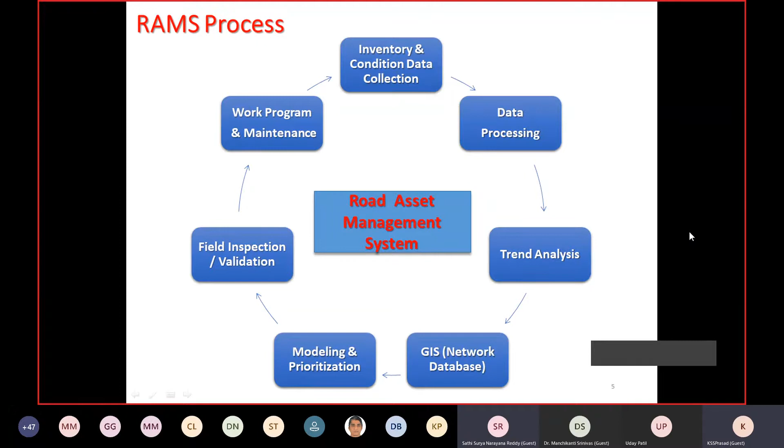So when it comes to the AP RMS case study, what we have done is basically there are three major objectives. One is to establish a physical RAMS system including the GIS database linkage. So a system is to be established because it's the first time in the state of Andhra Pradesh - they did not have it earlier.

And then prepare multi-year rolling programs, or maintenance plans for road improvement, annual maintenance plans. Multi-year means every time I generate a 5 or 10 year maintenance plan, and every year I generate, so there is an overlap of the whole system wherein I start building the dynamic database, and then institutionalize the RAMS system at the organizational level, the R&B department level, and then transfer the skills and procedures to the staff designated in the department to take it up on their own.

Hope I am not going too fast. Please interrupt me if I do so.

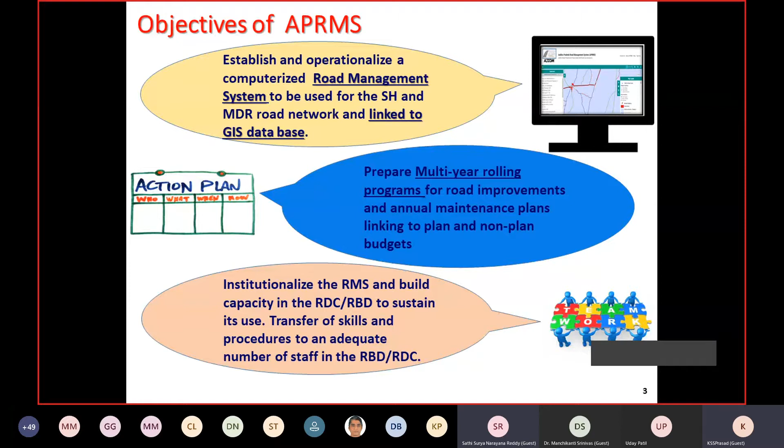Okay, the RAMS framework we adopted to do this case study involves four major components.

The first one is data collection, wherein automated survey vehicles are used and we collected a lot of data. I will give more details on the data, what we collected and how we collected it, in the next slides.

We created various types of information systems which are subcomponents of RAMS. RIS is road information system, BIS is bridge information system, PMS is pavement management system, RMMS stands for routine maintenance management system, and TIS stands for traffic information system. So there are several subcomponents of RAMS, overall five subsystems we call them.

We use all these systems together to take decisions and model the data for decision making. For modeling this data, we use the Highway Development and Management tools developed by the World Bank, HDM as we call it. I'll give more details later.

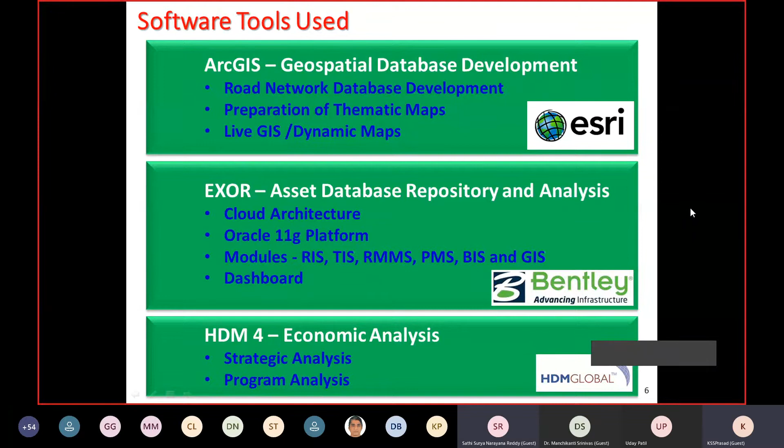This entire architecture is working on a cloud architecture, as I mentioned earlier, meaning there is no physical hardware system. Everything is on the cloud environment, and what we are using right now is on a web architecture. There is a server in the cloud, and we access the server and put up the data there.

This data is loaded into the Oracle database using loaders, we call them CSV loaders. Once the data is enabled, each data goes into its respective component or subsystem, like the traffic system will have the traffic data. Then data analysis, data maintenance, and validation of outputs - all three components use the same system and same subcomponents.

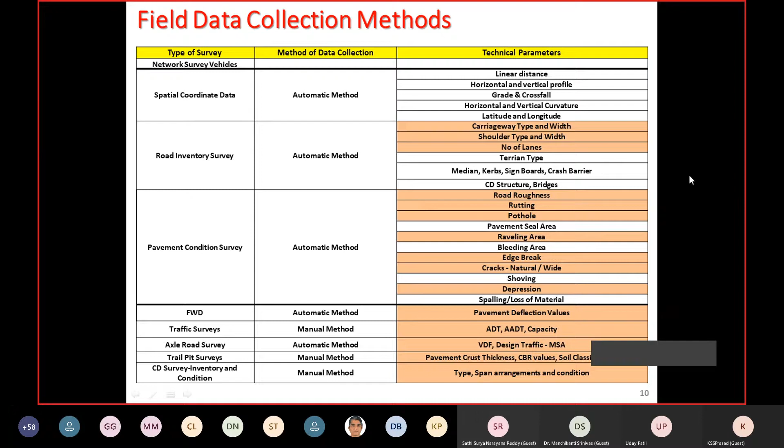Shall I go to the next level? Yes, sir. Yes, sir.

Yes, as part of our case study, as I told earlier, we also need to come up with what kind of data, and when should I collect it.

Because based on the road usage or the traffic or the various road and pavement composition details, we have to give the department guidance on where to collect, when to collect, and what kind of data.

Now we look at the kind of data collection mechanism, as I told earlier. This is the kind of NSV vehicle which has varieties of things.

You can see the zoomed in portion wherein there is a laser profiler which collects the IRI, International Roughness Index.

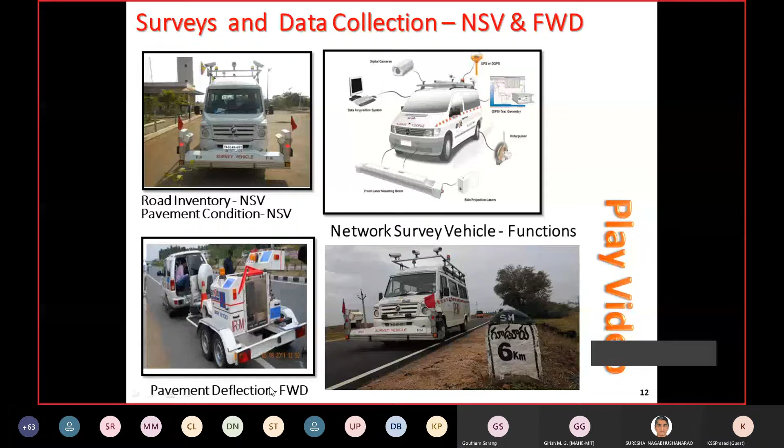You are seeing slide number - yes sir, 12 we can see now. Now 13. No, you need to show the slide. Yeah, it's showing it already - now you are on 13. I am there only, no, there is a little blackout, we can't see. Yeah, we can see the entire screen it seems. Now you can see - yeah, you are on the 13th slide. Yeah, everybody is on 13 only now? Yes sir, yes sir. Okay now, yes, show the slide.

Yeah, I moved to the next. No, no, still we can see the 13th slide. Actually it should be in slideshow mode. Slideshow - yeah, it is not in slideshow mode. Yeah, we can see some. I did not do anything. Now? Now 14, yeah, slide number 14. Okay, I'm just moving, can you see the change now? There is a little delay it seems. Okay, can you show the slide and then keep moving a couple of slides.

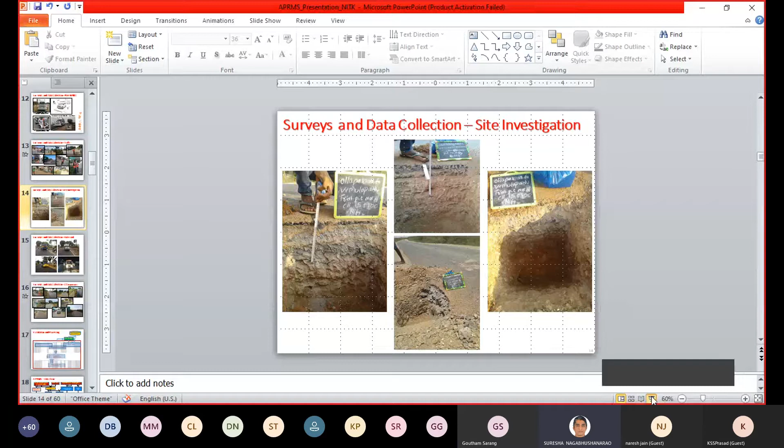Hello, yes, okay can you show the slide? Slideshow - yeah, slideshow only, I am in slideshow. But we are seeing - I think you are not selected, I think you might have come out. Can you come out of this screen sharing and then share again? Oh, I am in the share tray only, sir. No, because we are seeing - I am in share only. I am very much in the share tray. Okay, that's what - can you come out and reshare it? I have to break it and, yes sir, yes sir. Can you see now? Yeah, slide number 12 we can see, not in slideshow mode, it is in layout mode. Since it is somewhere blocking, that's why - hello, better come out sir. Yes, while sharing just select the desktop, don't select the PPT window, don't window share, select desktop sharing. Yeah, I am using desktop only, dear friend.

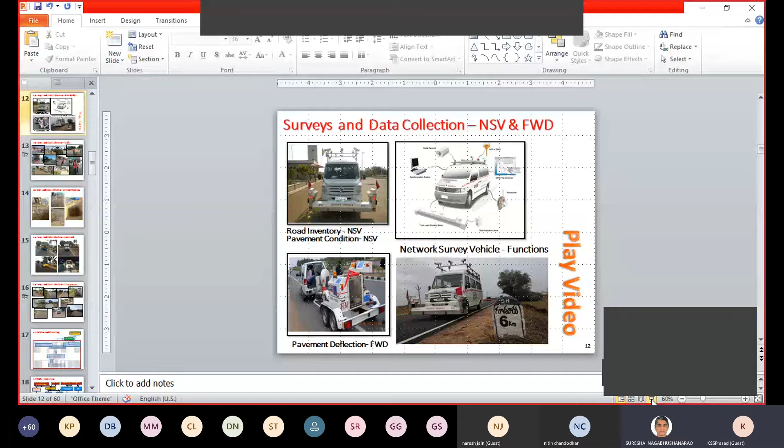Go to 13th, 14th, like that. Yes, I am going. You are not able to see. Okay, can you show the slide? I am moving now. See sir, we can't see, the same 12 is still there.

Probably while selecting the PPT in the tray, you might have selected double. Already there is a slideshow file open. No, I'm sure.

What is that you are seeing now? Now the complete layout of the PPT with sidebar. It is, yeah, not... you have kept the cursor at an image having a milestone 6 kilometer. I think it is not showing, somewhere it's physically blocked, I believe.

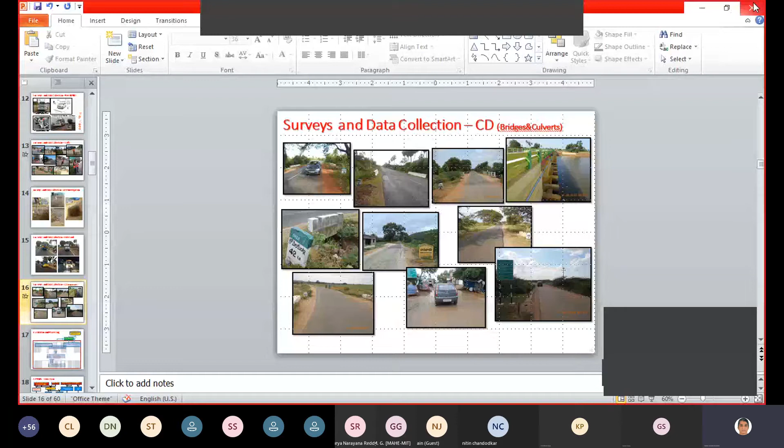Okay, please can you come out of that, close the PPT. Open the PPT and then make it a small window of the PPT. Don't go for a slideshow, don't go for a slideshow. I'll do that, okay.

Now I closed the PPT, I'm again opening it fresh. So you are not seeing anything now? No.

Is my screen shared right now? We don't see, we're not able to see anything. I mean, I can just see the display initials of all the participants, around 9 participants.

Okay good, okay I closed the PPT, now I'll fresh screen share. I will, don't show the slide now itself. Okay, okay.

Something utter wrong, it's not.

Okay, not able to... now you can see the... yeah, yeah, you have selected the complete layout, right? PPT layout, correct correct. Now the first slide, you are able to see it in the layout. Yes, slide, yes yes, okay.

Now I think, now can you show slideshow? Can you go for slideshow? Yes yes, I am going, I am going. You are able to see the next slide.

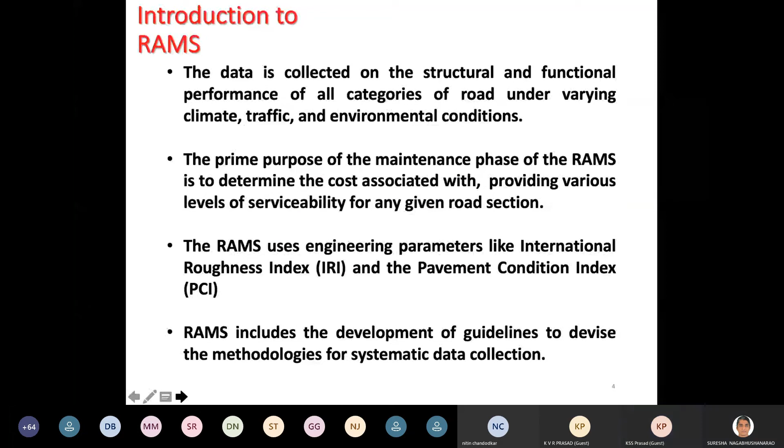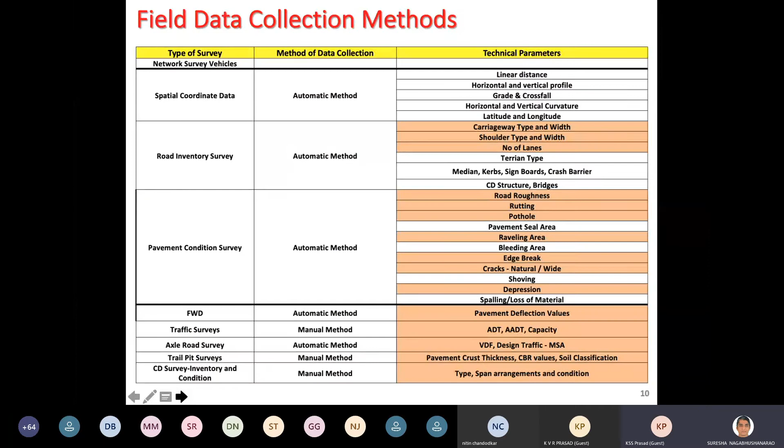Other thing is there is a restart of the slide numbers. That's okay, you just continue, we'll correct it and give you. That's not an issue, please carry on. I hope for everybody it is visible, and I hope we stopped at this level. Am I right? Yes, yes sir.

Being all civil engineers, we are all aware that CBR is one important parameter which we collect through this log, and then try to understand the pavement composition, which you can see - the pavement crust thickness is measured using tapes and things like that. This CBR is again a soil test done in the laboratory, and the CBR value is arrived at.

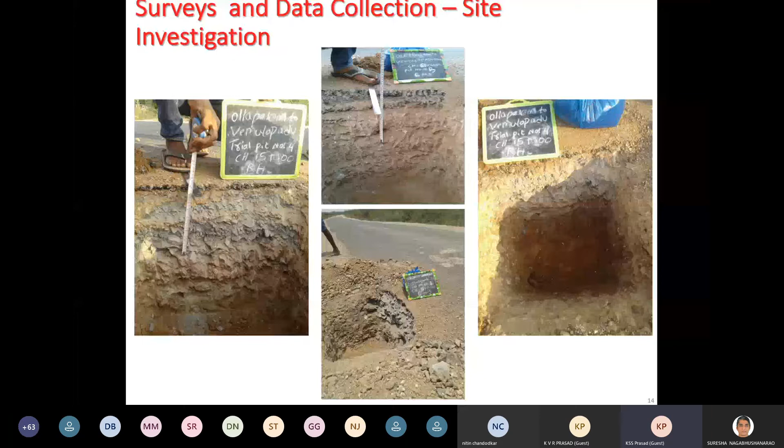Go to the next. And axle load is one important parameter which again gives you the load of the vehicles which the road is bearing or being used. This is another important parameter to define and derive what kind of pavement composition we should have. So this is another data which we collect using pads, which you can see under the tire of the vehicles - a pad is put and then they will collect the vehicle loads. Okay, next.

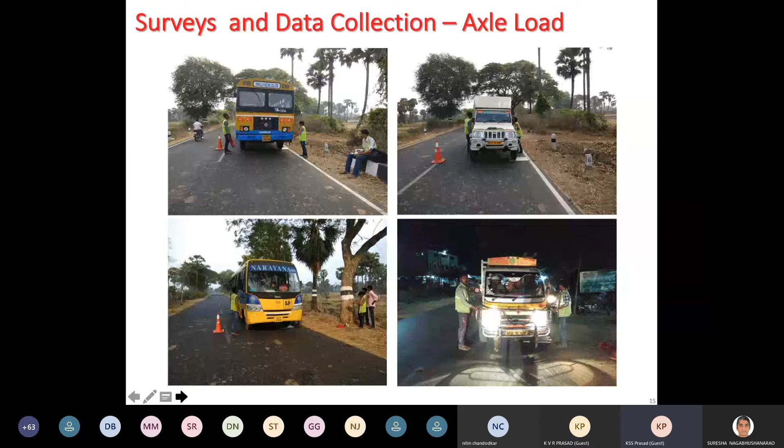And as I told you earlier, along the roads, the cross drainage structures, CD structures, which are basically bridges and culverts - the bridges and culverts data is collected, and there are a number of parameters on each bridge and culvert that is collected. I will explain the data further. Next.

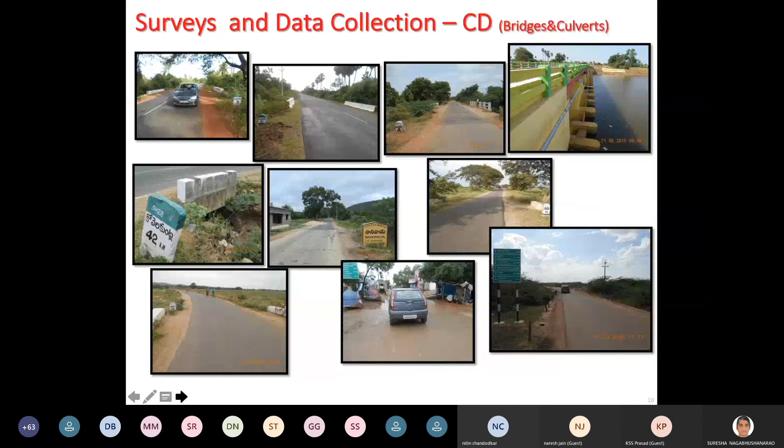After doing all the data collection and compiling the data, we need to validate it for several reasons, like there may be some manual entry mistakes, typographic errors, or compilation errors, or issues while merging the data - while merging, you might have missed something. So for all this validation, there are certain scripts needed to thoroughly check the data quality and validation. We have come out with that kind of validation. I'll just give you an example.

In Indian conditions, IRI, which is a roughness index parameter, is an important parameter. Normally in the international scenario, 16 is the upper limit of IRI. But in our Indian conditions, on majority of our roads, we get even 20, 25, 30 number also of IRI, which is something like an ECG of a heart - IRI is for a road. So we need to restrict the validation criteria - beyond 16, we don't want to accept that value. Either it could be because of a bump on the road, or maybe a physically completely road gone off the road, that kind of thing.

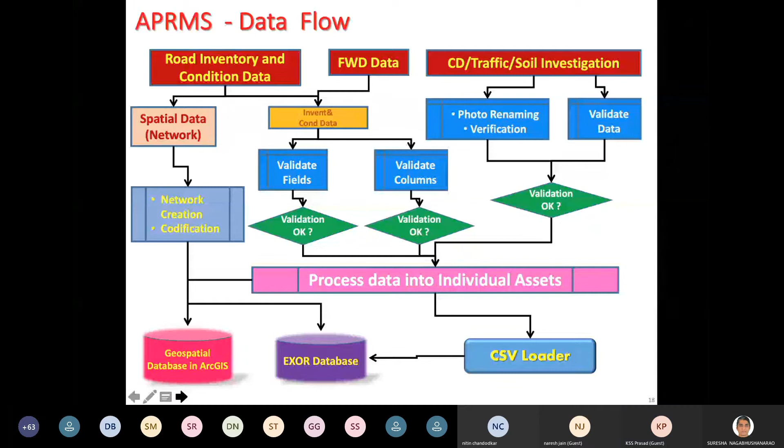The first step we do is GIS database creation, the spatial database creation. Using the DGPS data - hope you are all aware, DGPS stands for Differential Global Positioning System - it gives GPS with high quality measurement, sub-meter measurement, centimeter level accuracy.

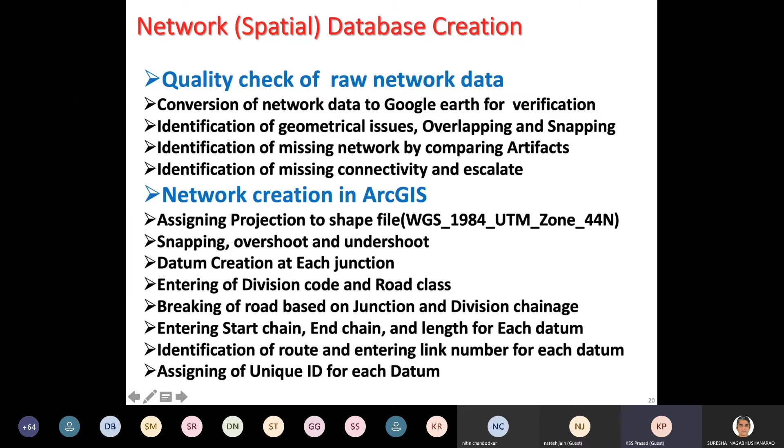Let's go to the next slide, I can explain the map making process. You can see here two parts. The first one, the top, when we receive the DGPS network data, that is overlaid on the Google Earth satellite imagery - we have all the satellite imagery from Google Earth. Hope you are all aware of Google Earth; people use it, even in Google Maps there is a satellite option. It's the same data coming continuously on screen, and then we can cross-check the road network correctness using the satellite imagery overlay.

After doing all the corrections, we create what we call route creation, and that has a lot of parameters - it involves the start and end chainages of the road, the datums, and the junctions. Like here, the green one is a road going here, and I am adding another road in red color. There is a junction formed here. The nodes of all junctions, start points and end points, are created with a numbering system, and we can use them for analysis at the next level. So this is called route creation.

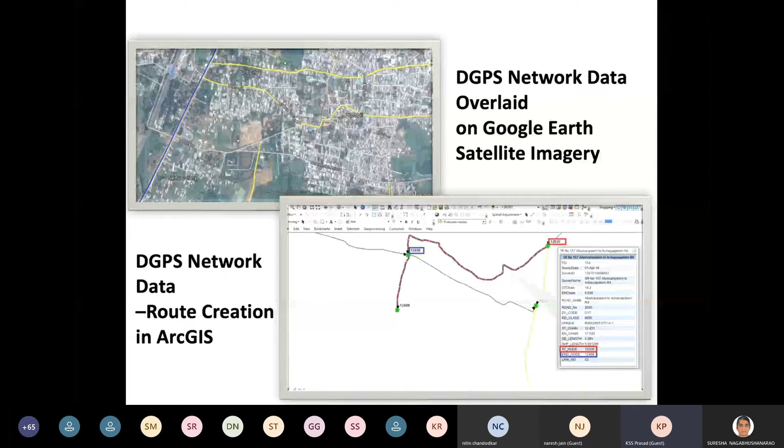The network analysis functionality, commonly used in Google Maps for our navigation every day, is basically the network analysis functionality which creates these maps using road navigation. Like when you go from Hyderabad to Bangalore, we put it on Google Maps and see navigation continuously coming on. This is the function which is the first step to generate a road route, then adding all these nodes and defining them. This is exactly what was done for the entire state of Andhra Pradesh, for all state highways and major district roads.

You can see here 4 parts. While doing the GIS data creation, there are so many issues we need to resolve. Like here, there is a missing link in the first slide - hope you can see it clearly. This missing link is basically because the DGPS has not given the data, so there is a snapping issue. I need to snap it and then join this road junction.

There could be another difficulty - a road is surveyed 2 times and I am getting 2 overlapped segments, so I need to keep one and remove the second one. Then the third one, there is a physical gap - there is a circle you are seeing, with 2 parts coming and stopping at the circle. Can you see that?

Yes, sir, we can see.

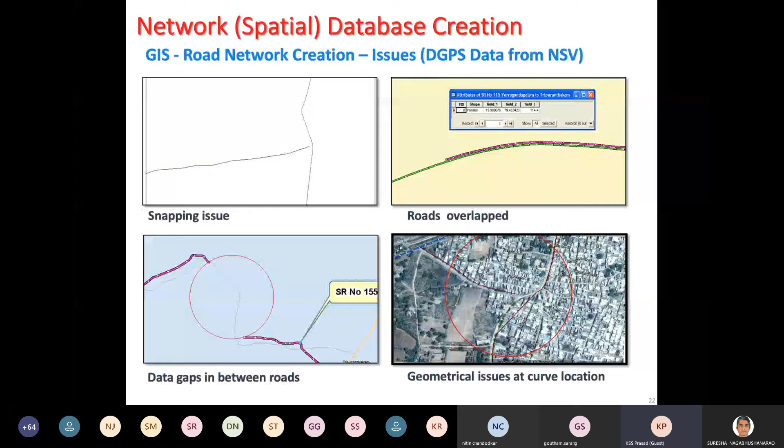Go to the next slide.

With all this being done, the entire state is now having the sub-meter accurate road network map of Andhra Pradesh, which has all the routes created. It is a linear reference system, LRS. Basically, it is a chainage based system, which is in practice for all the civil engineering fraternity.

And it is network analysis ready, and there are unique IDs built for all the analysis. State highways and MDR codes are also generated. There is a coding system with the NHAI, National Highway Authority of India, following from north to south and east to west. That same mechanism is used also in Andhra Pradesh for the state highways and MDRs.

Go to the next slide.

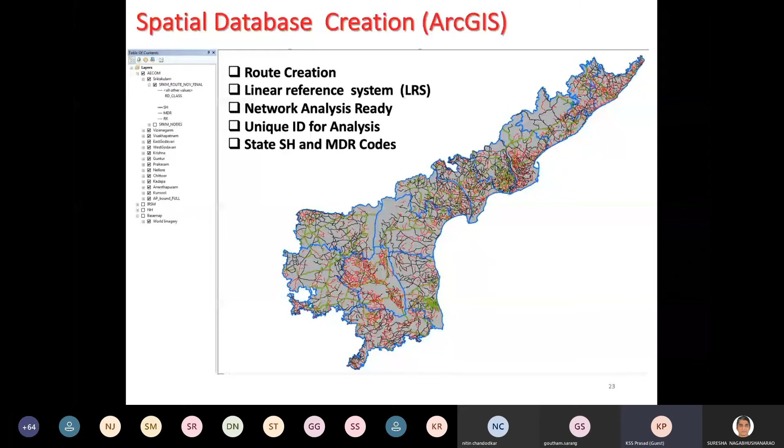In the center you can see these are all state highways. The state highways are numbered and the major district roads are also numbered for common usage. This data is already given to Google Maps and they have embedded that into the Andhra Pradesh road network map of Google Maps. So this is the kind of contribution done to the general public consumption of this database. Next slide.

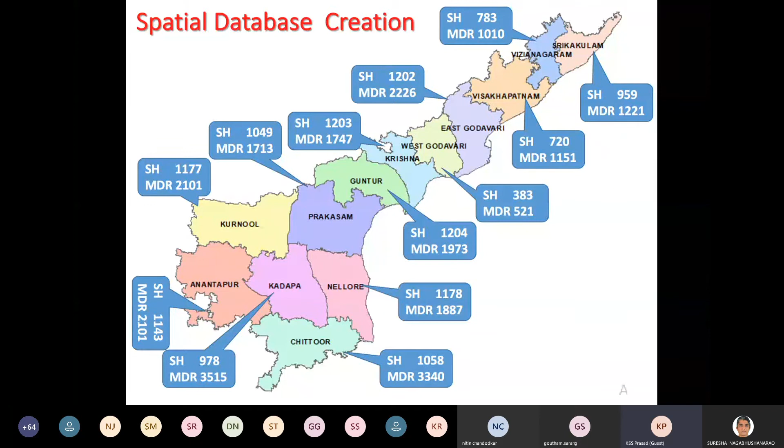We can now look at some numbers. Every district in Andhra Pradesh now has a number of state highways and number of MDRs, starting from Srikakulam to Anantapur in the south. So all the state highways and MDR roads, district wise, are now numbered and the number of roads is available. Next slide.

As a sample or example, I am showing you the GIS database created for one district. This is called Prakasam district, south of Vijayawada. You can see here the red color indicates the national highway network, and green color and red color are the state highway and MDR roads. Next slide.

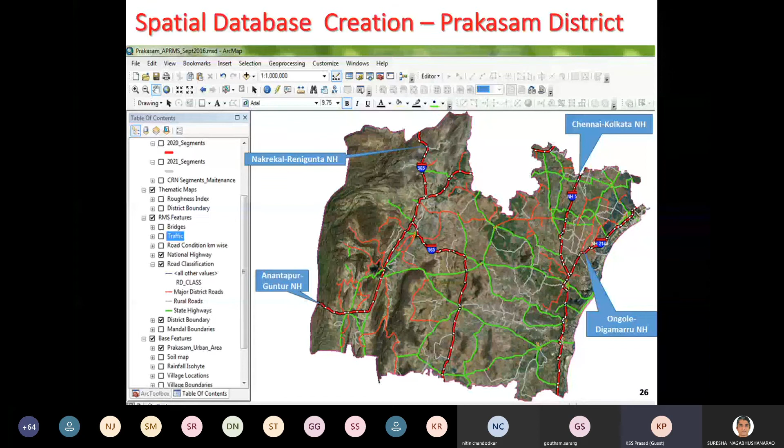Hope you can see. Yes, I can see.

Here you can see the road network overlaid with the mandal boundaries. In Andhra Pradesh, we have the administrative divisions as mandals, next to the district. So all the administrative jurisdictions with mandal names and roads overlaid, this database we created for the road network is now put into practice in the state level GIS database system.

And you can see star marks and plus marks on the roads, which are nothing but major bridges and minor bridges and culverts. Like that, traffic and other data is also embedded into the system. Next one.

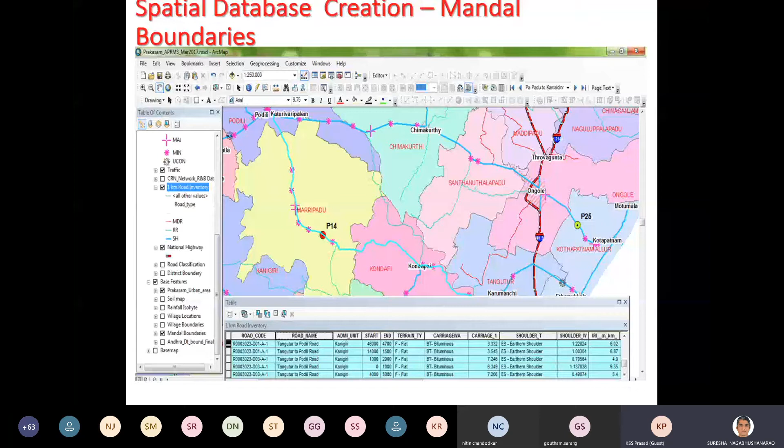Next slide. Is this road inventory? Next slide. You want? I am at the 30th slide. Yeah, you are right. Should I go forward? One step back. CD inventory. Back. Road inventory. Yeah, give me road inventory.

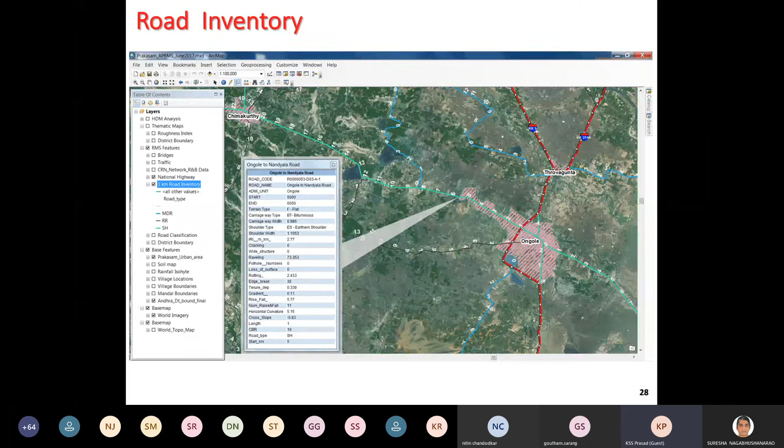Now we conducted traffic volume surveys. Every traffic volume survey is conducted at a designated location. There are about 65 to 100 locations, and each location's data is already analyzed so we can see the AADT value of the traffic survey. The AADT value for this particular traffic is 2102, average annual daily traffic numbers, and the PCU, passenger car units, is 1828. So this kind of traffic information is also embedded into the GIS system. Next slide.

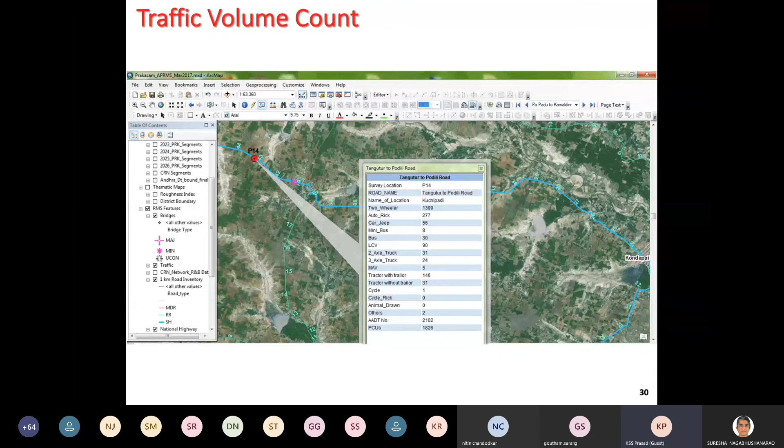This is an important parameter, IRI, which we explained earlier. IRI is International Roughness Index. This is the primary parameter nowadays to check the condition of the road, whether it is good, bad, poor, or whatever. By IRI, people immediately know the condition of the road. Now, this IRI data is continuous in nature, meaning every 10 meters the IRI value is generated by the network survey vehicle, and that data is already with us.

Now I classified the same IRI into the standard practice of IRC, Indian Road Congress. IRC tells us 1 to 3.4 IRI is good, 3.4 to 4.6 is average, 4.6 to 7 is poor, and 7 to 17 is very poor. There are 4 classification levels in this IRC system. Using that template, I classified the entire IRI of one district's road network. You can see here that the majority of roads fall in the poor to very poor range, shown in violet and red color. I hope you can visualize that.

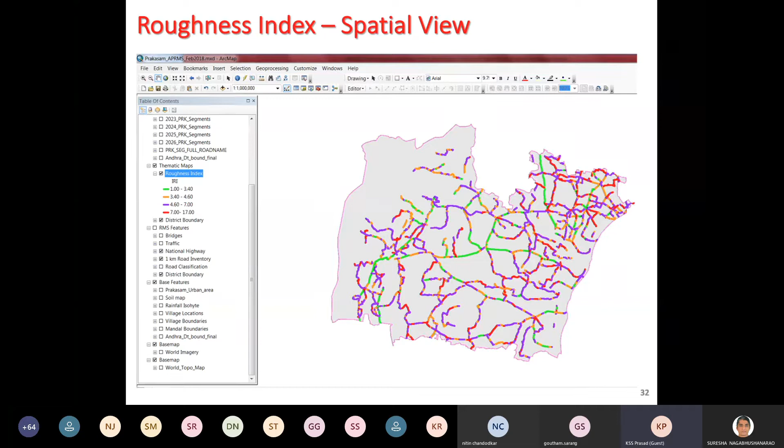So this is the kind of analysis we can do with several parameters. I just took this as an example because IRI is an important parameter. Using this, we can see the condition of the road, or which sections of the road are bad, good, poor, or whatever status they are in. Next slide.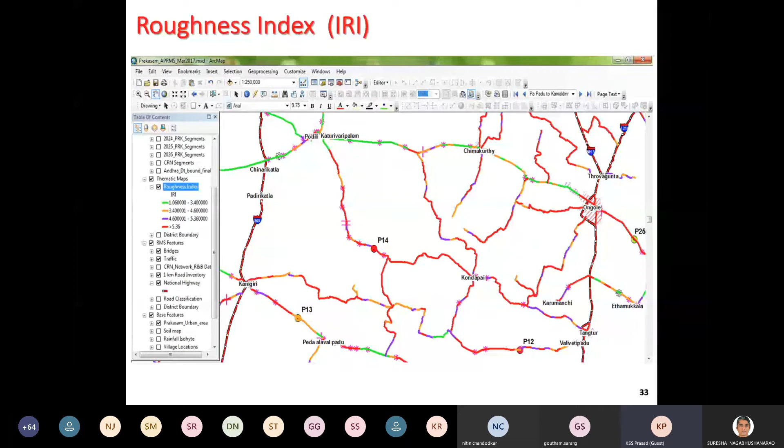So a zoomed view of the same IRI lets us see more clearly. Each section of a road is physically in several states as far as pavement condition is concerned - certain parts are good, certain parts are bad. But this IRI survey was conducted in 2017. Now, after 2017, based on this IRI and other parameters, we are giving some maintenance programs. After doing the pavement strengthening or whatever it is, you again have to conduct this kind of IRI survey to physically see the difference between the later and former pavement condition, strength, weakness, or whatever state it is. Next slide.

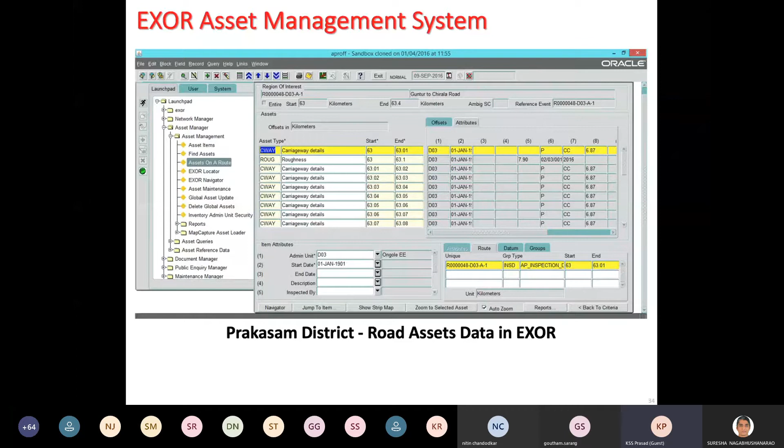Now, in the beginning, the system architecture, we were explaining there is an Oracle-based database repository. This is nothing but EXOR software. This EXOR software is a cloud-based asset management system software. You can see here on your left side varieties of subcomponents which I explained in the beginning, like RIS, TIS, BIS kind of things. Each one is a subcomponent and the data is fed into one single road here.

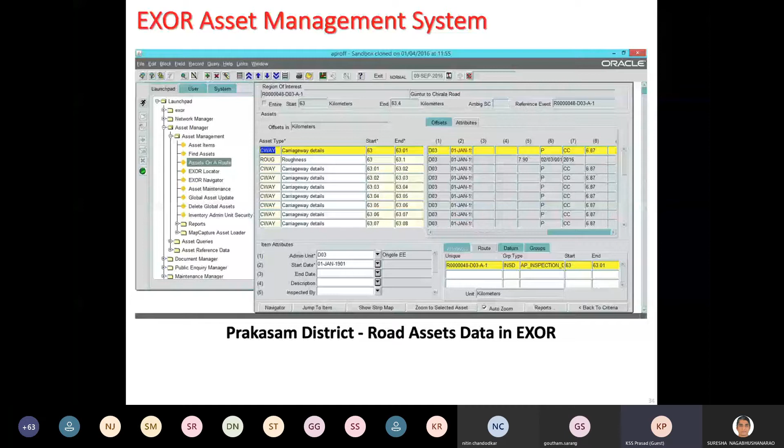On your top, you can see the road code, and then the road, each section is given the start and end sections and then the various parameters. Like this, EXOR software takes all the road network data into the system and maintains that as an LRS system. Next slide.

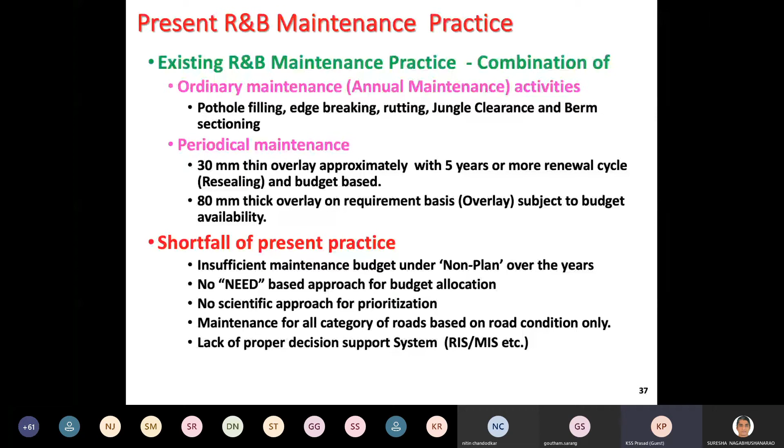Now, all the roads are the same to them. There is no categorization, there is no prioritization, there is no state highway, district road or rural road concept. Whatever is required, they will do small terms of maintenance. So there is no decision system already available with the department in a scientific manner. This is the gap which they have today. Now we have the data with us. So how to come to their rescue and how to develop a maintenance plan for them is our next task. Next slide.

Let us just try to understand the one Prakasam district, what we have seen in the data just now. How many number of roads are there? There are 40 state highways, and the total length is 1050 kilometers. And what is the IRI? IRI in 2016 is 5.2, and the overall quality is poor as per the IRC, Indian Road Congress standards. It is the poor category.

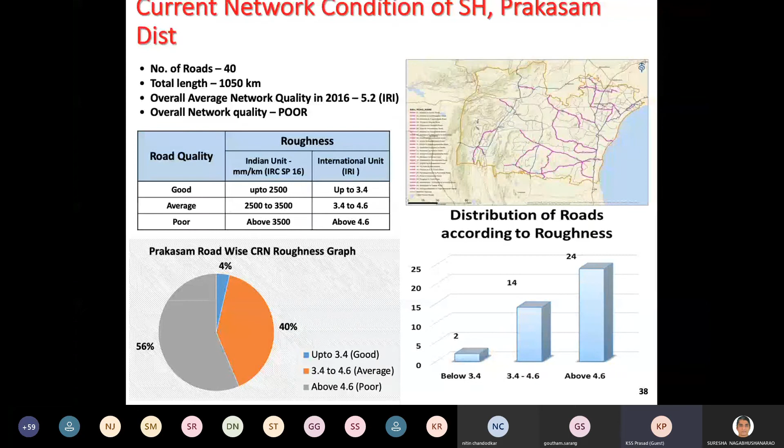Now, looking at the poor category roads, what is the kind of distribution among these roads we have seen? There are 24 roads which are very poor, 14 roads are average, and there are only 2 good roads within the district. So out of 40 roads, the good roads are only 2. This is the kind of current network condition of one district.

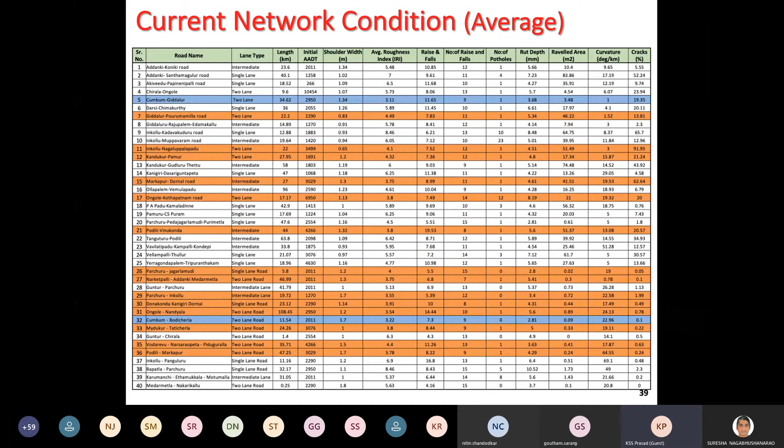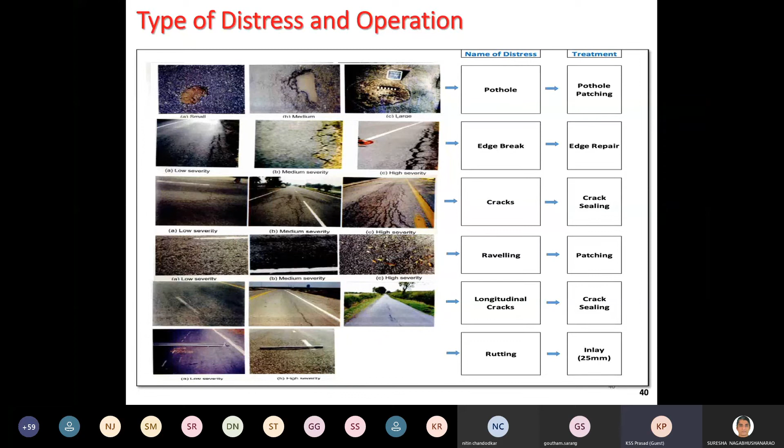The same way, if they do an overlay or resealing of the road, when do they do the resealing — like when the IRI is more than 5 or whatever — berm sectioning, when do they do it. All this kind of distress and operations, what they do presently, we try to collect.

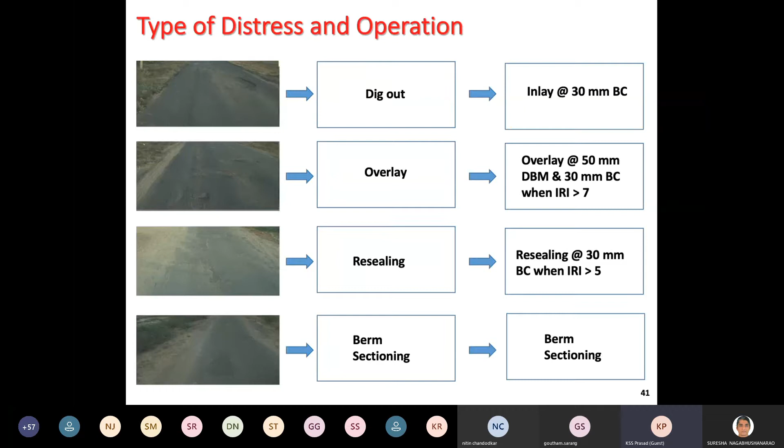Then we try to understand what is the strategy we need to adopt for the maintenance of these roads. What is our overall objective, and then what is the strategy we need to adopt?

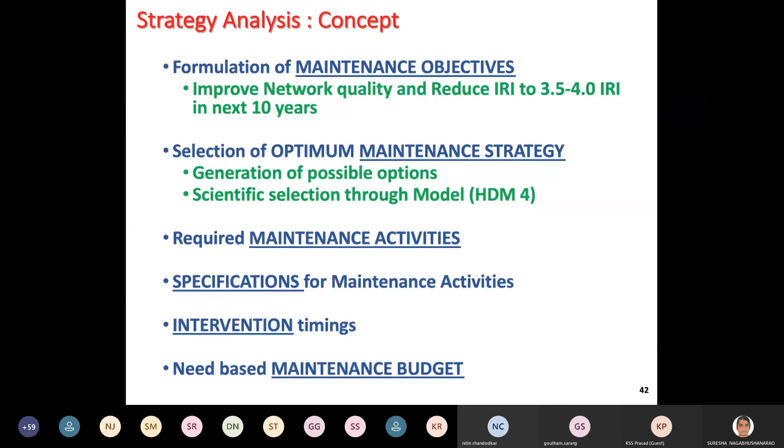Now here you can see what is the present practice and what is proposed in our road management system. A variety of routine maintenance activities, pavement related, non-pavement related, and periodical maintenance activities — all 3 of them put together, what is the overall strategy we need to adopt?

So there are 6 possible strategical options in the HDM4 software. The modeling software can give 6 kinds of best practices. There are 2 types of practice — one is scheduled based practices, the other is responsive type of practice.

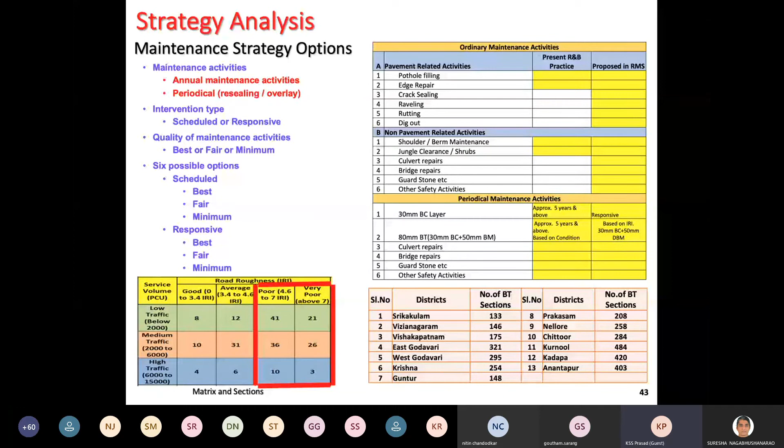In the scheduled type, there is best, fair and minimum. Again, in the responsive type, there is best, fair and minimum. Go to the next slide, I will explain further.

So there are 13,000 to 14,000 kilometers of state highways, and 32,000 kilometers of major district roads, with some ODR roads converted into major district roads. The state level objective: the department wants the road network quality, the IRI, maintained at 3.5 to 4 in the coming 5 to 10 years for the state highways, and the same IRI for the major district roads at 4 to 5 in coming 5 to 10 years. This is the state level objective.

To meet this objective, next slide.

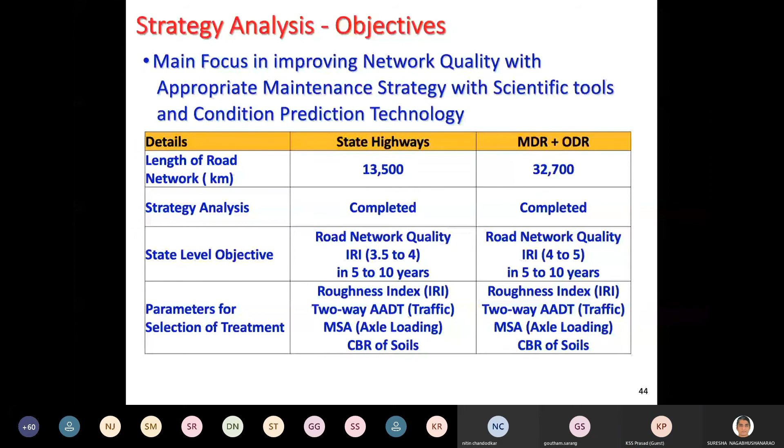Next slide, please. To meet this objective, you can see here there are a total of 6 strategies. In best responsive, there are 3, and in schedule, there are 3. Responsive has 3, and schedule has 3. Total 6 deterioration modeling practices are applied to this pavement data.

Each road, each section of road is passed through 6 types of deterioration modeling. This is an important thing in the entire practice.

All the road network pavement data along with the pavement condition index data is physically subjected to the modeling software using 6 strategical options, and each option has got certain parameters. I think the details are with you, you can go through.

And these 6 practices, when they are subjected to modeling, this modeling software gives certain outputs. Go to the next slide, please.

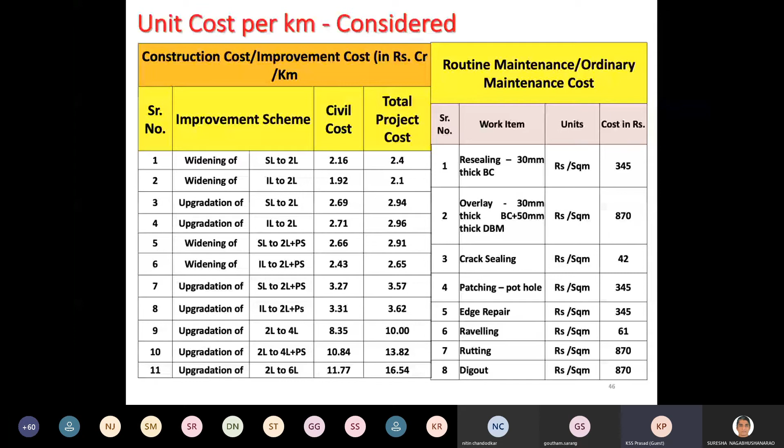This is the HDM software, Highway Development Management software, developed by a group at the World Bank. It is used for deterioration modeling of pavements and for economic analysis of pavements, to come out with prioritization of roads and the cost involved in the maintenance activity.

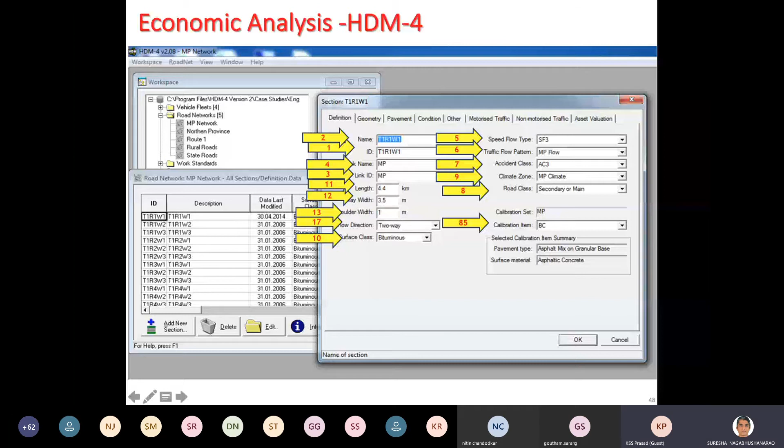the modeling software has given us the optimum strategy in the present environment. It is a 10-year analysis, meaning for the coming 10 years, which road is to be taken up first, which road is to be maintained and for what kind of pavement management. Out of all 6 types of practices, minimum responsive practice is found to be the optimum strategy, because the IRR, the internal rate of return, and the cost benefit ratio are good for the minimum responsive option.

The cost benefit ratio should always be more than 1 in terms of economic analysis. For any project, not only a road network, the cost benefit ratio should be more than 1, only then is the project viable. It should be the internal rate of return and the cost benefit ratio which determine the returns on the project.

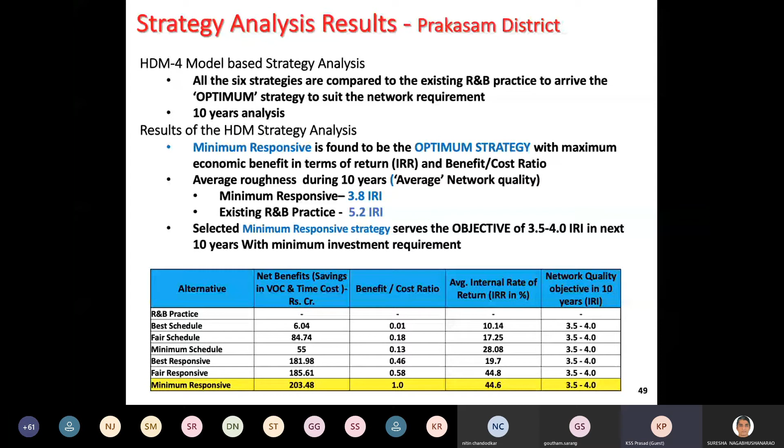So keeping our network level target of IRI 3.5 to 4, the minimum responsive type of schedule gives us the optimum benefit for the coming 5 or 10 years. What this means, we will see in the next slide.

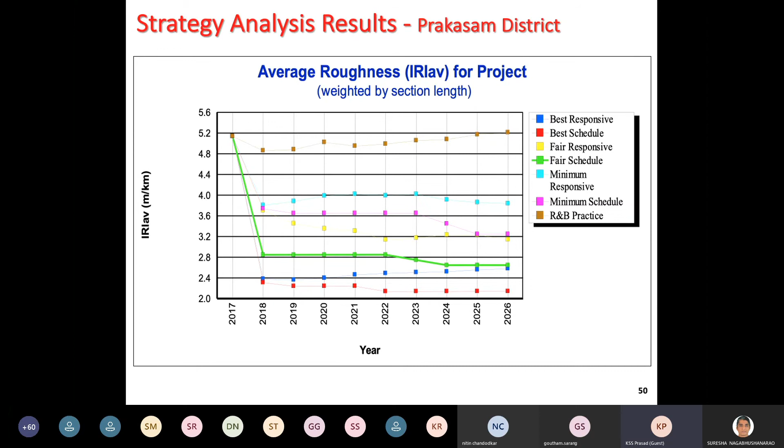Here is the road network, which is already subjected to the modeling software. It gives us, in 2017, these roads with so much length need to be first taken up, with the kind of description, such as resealing for 30 mm.

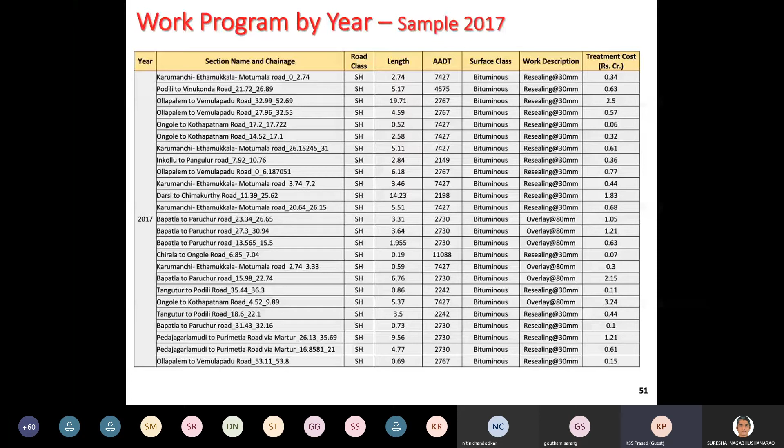This is the very detailed work program generated using the HDM software, giving all the parameters, and finally coming out that the Karumanchi Ethamukkala Motumala road of 2.74 kilometers, the first one in the rows, is the first road which we need to take up for resealing. This is the kind of very detailed work program you can generate using this entire road asset management system software integrated methodology.

If you take up all of them together in one year, fine, the entire network target is reached. But if you have a funds problem, then you have to prioritize your maintenance management or routine maintenance, and go for parts of these roads or sections of these roads based on this criteria.

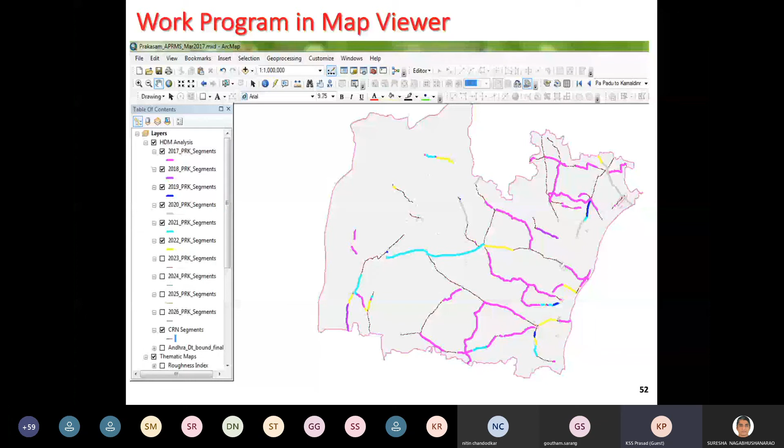Now you can see a detailed work program, which is already generated in GIS. You can see a particular stretch of road in the year 2017, and that particular part of 1 kilometer has to be bituminous using a 30 mm resealing. So up to this level of kilometer level aggregation, kilometer level information of maintenance management can be generated using this integrated software approach.

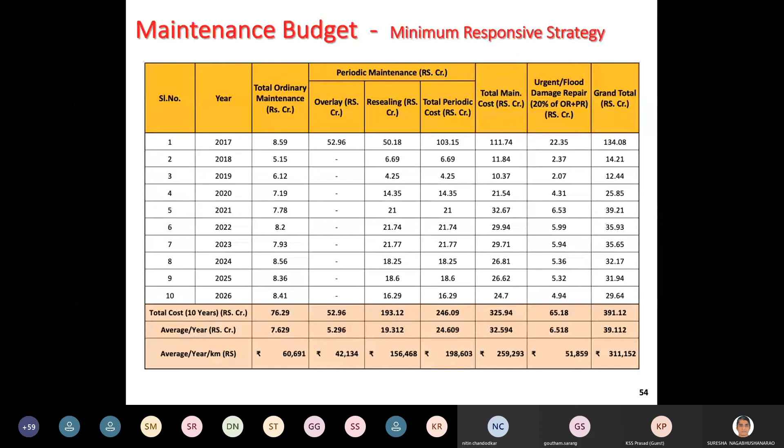Everything together becomes a very good understanding mechanism for the road asset management system, useful for BTech or MTech projects, which we can propagate so students understand this entire mechanism. They can take up a district, since this data is available, and discuss with the people involved, and study this as well.

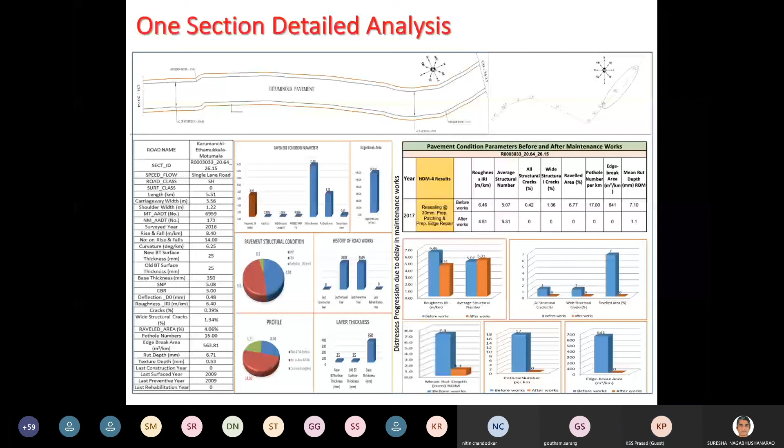Now, when it comes to validating our work, we have generated the pavement maintenance plans, but we need to validate them.

So for validating this, we went to the field. Along with the R&B department, we made teams and validated this data.

Am I audible? I think there is a disturbance. Yes, no, it's audible. Okay. I thought some disturbance came.

So we made teams and then we physically went into the field.

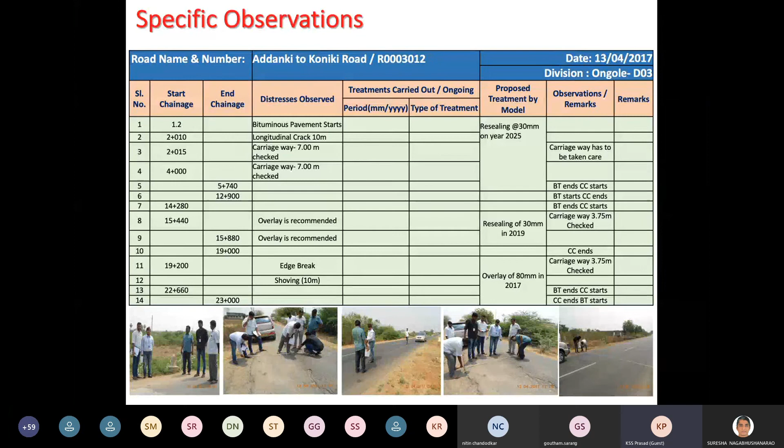You can see in the strip photos several teams went to different roads to understand the present condition of the road and what the data is talking about. The data is already spread over the sheet, up to the chainage level, start chainage, end chainage, distress observed, and the type of treatment proposed. We created these tables and went to the field with various deputy executive engineer level people to understand whether the software-generated model gives us the correct picture on the ground.

So the next slide also gives some picture of this.

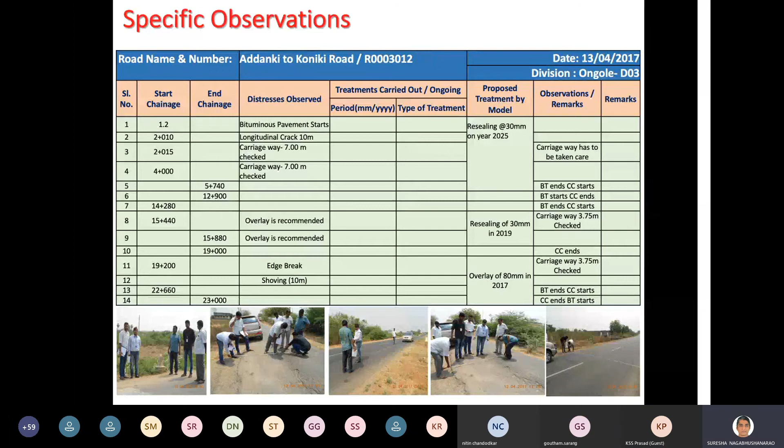So this way, physically we went through it and found that 85% of the modeling program, the works management program we generated, is matching the ground reality. That 15% gap is because of various reasons, either changes in the road or the data received being incorrect, or other factors. But with 85% confidence, they can now straight away go for proposals and technical sanctions based on the cost involvement and budget estimates we generated, and proceed with budget proposals for the R&B department for road maintenance programs.

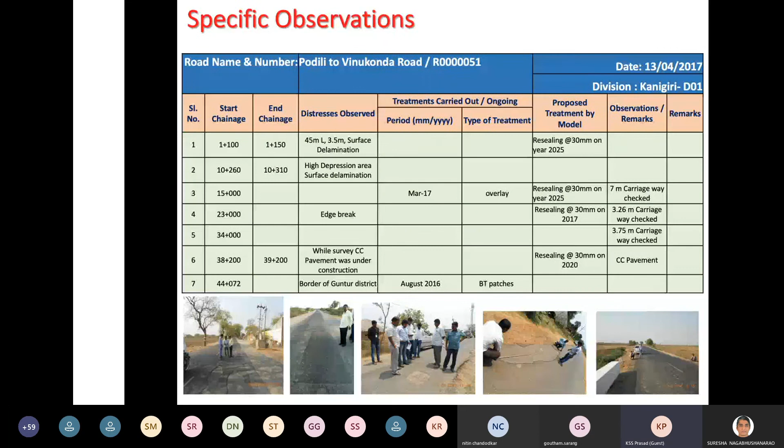We conducted varieties of workshops, state level workshops in 5 places across the state, and called all the R&B staff and ground staff to make them understand the quality and importance of data, and the variety of data we collect which is useful to them in their day-to-day functioning. Every bit of that data and the information system we collected is quite useful to them; they should understand it, use it, and update it. With that context, we conducted state level programs to energize and educate them about this kind of scientific analysis.

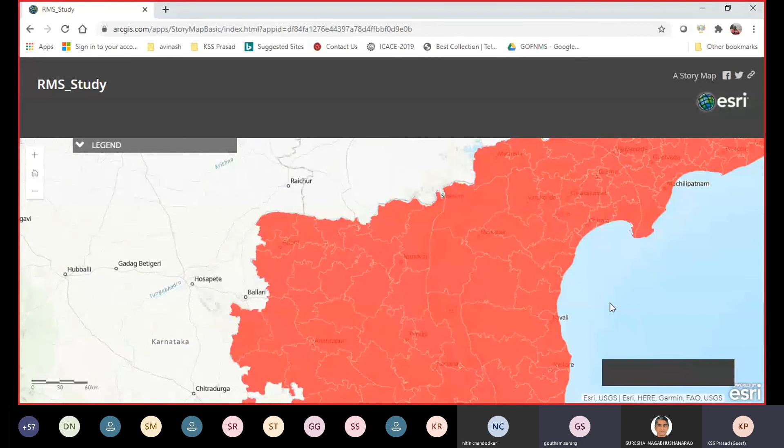You can see the districts. I am just zooming in. Now you can see various administrative boundaries, and now you can see Prakasam district, which I am showing as a pilot.

So now this is the rainfall data which we superimpose to study what kind of rainfall influence is on the road network. I can now open the legend, and you can see the major state highway, MDR, and rural road.

So I can now go and click on any road. You can see that a panel is open and we can see the details. A variety of data is already there at your fingertips.

Every kilometer, I'm just clicking the next kilometer. It is start 10 and end 11, meaning a 10 to 11 kilometer strip of this road.

This is the kind of data that is already available in the system. What is the IRI? 3.05 is the IRI of that particular strip. And ravelling, potholes, loss of surface, rutting—this kind of data is already there.

Now coming to the traffic survey, you can see here, the more the number, the bigger the circle for traffic AADT. You can see small and big circles in the map. Can you visualize it? Yes, yes.

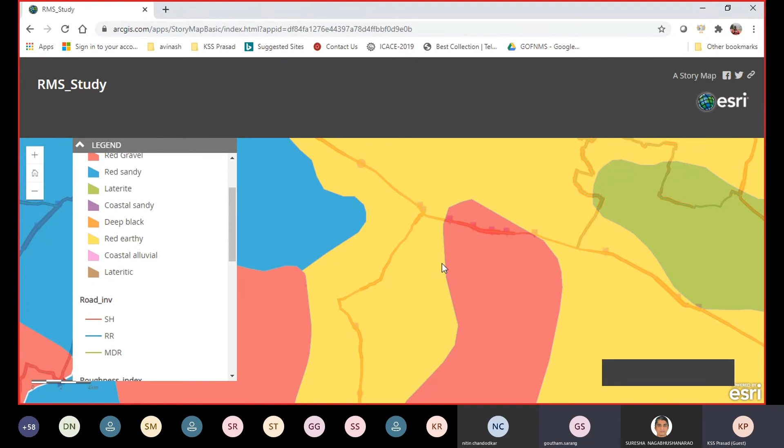So now I go to the next level. I superimpose the roughness index. So I can see here now the roads with this thickness—what thickness? The IRI more than 16 is one thickness.

So this is the kind of quick analysis you can do with the road network and make out what kind of data is there. And now I'm talking about bridges here.

Now you see here, this is a bridge. The variety of data which we collected for the bridge is almost 100 parameters of this bridge data is already there.

And finally what we say is the faith—the bridge remarks, good or bad or whatever it is. So how many number of spans, what is the kind of span arrangement, clear span, linear length—all these things are there.

So this is the kind of data I was talking about, already in place. Using this data only, we have come out with this.

You see here, now I have even superimposed the kilometer stretches. 13 to 14 is one stretch. So you zoom it, then you get it. Here you see, everywhere that kilometer stretch is highlighted and giving you the details.